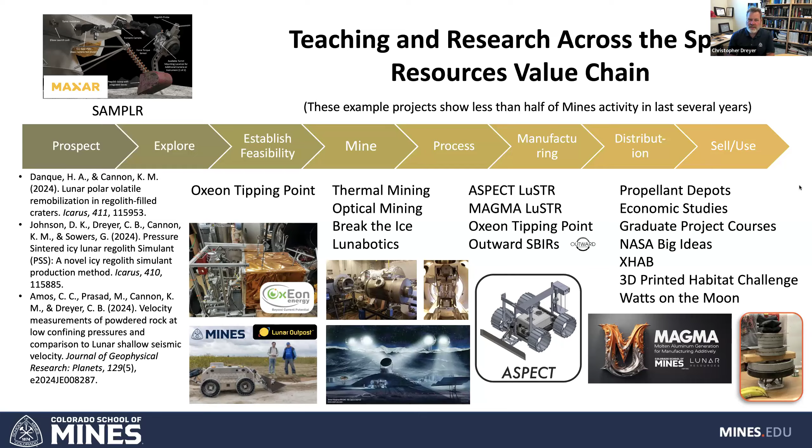So this is a sampling of various things we're doing. I'm going to go now into a couple slides that highlight individual projects. There's 3 different projects I'll highlight. This is the first one, where with Oxeon we demonstrated solid oxide electrolysis of water. Oxeon is the company actually behind the solid oxide stack or processing unit that's part of MOXIE, the ISRU demonstration on the surface of Mars that has converted Martian CO2 into oxygen and carbon monoxide.

It does have to be run at high temperature, but that gives you an opportunity to use thermodynamics to recuperate a lot of heat that goes into your reactants, that is present in your products. Some of that heat can come from the products, moving heat from the output side to the input side. It gives you some advantages, particularly gets your specific power down lower than any other process that you could conceive of that's similar to this.

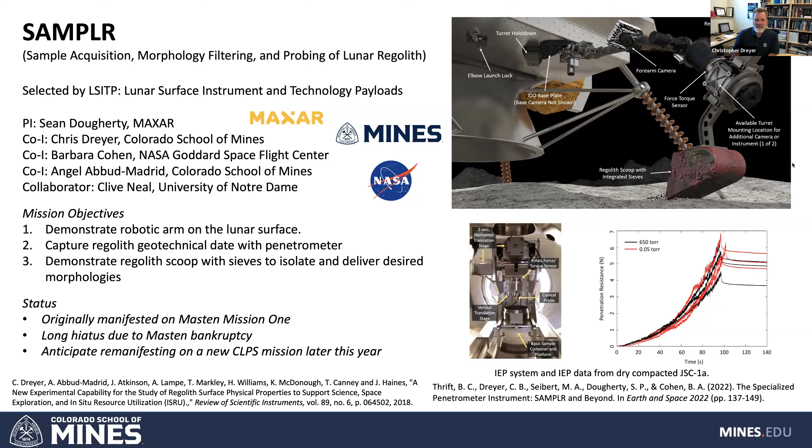Moving on, another big project occurring here, and I'll probably spend the remainder of my time in this presentation on this, is ASPECT, which is a NASA LuSTR-funded project to develop a push-button autonomous real-time motion planning vehicle capable of preparing a lunar surface for landing pad construction.

I'm the PI of this, and we have a large team, several different people at Mines: myself, then Andrew Petruska and Neil Dantam in robotics and autonomy. Jamal Rostami is a mining engineering professor, and the test site's going to be built in a location he manages. Dr. Cannon's been advising on simulated lunar surfaces, and George Sowers on infusion. We have a compaction system being developed from Michigan Tech under Paul van Susante.

And the base vehicle that we build off of has been built by Lunar Outpost. There's advising on terrestrial experience and site preparation from Bechtel, and Dr. Phil Abel is our NASA technical officer from NASA Glenn, who's been with us all the way along, giving us advice and suggestions on how best to do this.

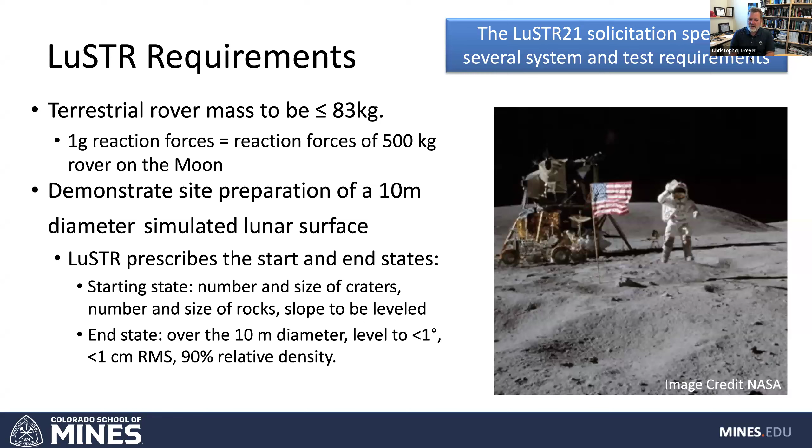Also, we're required to do a demonstration of preparation over a 10-meter diameter. This is so that we have enough movement, enough regolith we're moving. We have craters that we have to fill in. There are a number of craters that are very specified, and we have a starting state that's roughly level, and a finished state that's roughly level and relatively smooth. There's a 2-meter diameter crater that has to be filled in, a number of other craters of different size, rocks of different sizes too, that have to be moved. So a 10-meter diameter site is relatively large, and we're building one here.

So why are we doing it this way? The available reaction mass, the weight of the vehicle, is all you have to work with. So due to low lunar gravity, this inherently minimizes the amount of regolith you might move per step. Our approach is we're going to carefully manage cutting and traction forces. We would tend, to the extent possible, to move only the low density, loose regolith as much as we can, as opposed to cutting into deep and dense regolith.

We also feel autonomy should be used in this context because all this would occur before human arrival, preparing a site for, let's say, a human-rated landing vehicle. And we have pursued where we are just imposing that we don't use teleoperation. In all likelihood, this is something operating autonomously with periodic human check-in to see how it's going and manage the process, but not continuous manual operation.

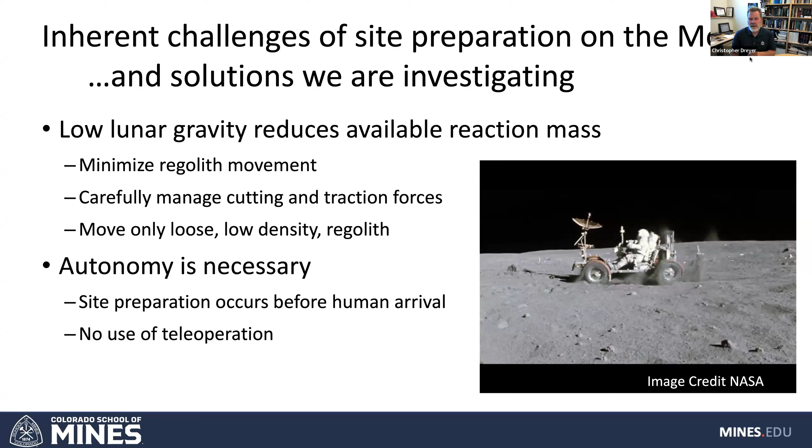This is the vehicle we built. This is in CAD. I'll show you it actually driving around in a little bit. On the left is our mass breakdown, and that's how we arrived at the successful mass. It's roughly 2 meters long, a little over a meter wide, and about 1.5 meters tall. What we call the dozer blade is on front, with 2 degrees of freedom. It's really a straight ahead blade that we can raise off the ground and tilt. We have rigid wheels and skid steering.

We've spent a fair amount of time lightweighting the wheels. Lunar Outpost spent a fair amount of time with the vehicle chassis. All the guts and power supplies and brains are under the box, and then there's a base plate that everything's attached to. And the compactor is in the back from Michigan Tech. This might still be an earlier version of it, but it gives you the sense. We'll talk about how that works in a moment. And then there are sensing platforms spread around as well.

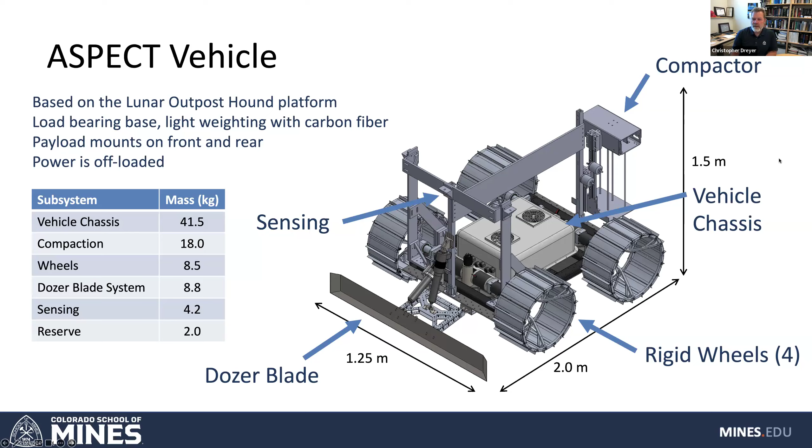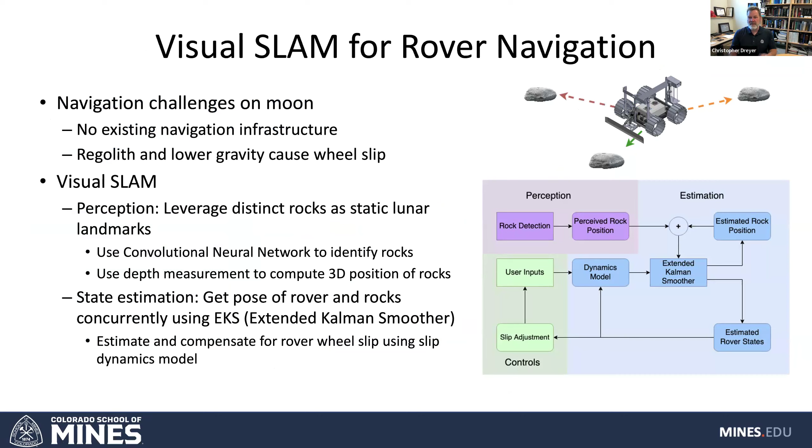We're using visual SLAM for localization of the vehicle within the test bed, cueing off different objects within the bed, both surface and rocks and craters. There's a neural network that is built to identify rocks just on images. And we use some of the best state-of-the-art methods to build up this SLAM. A little bit more on that.

One of our processes has been that we're using visual identification of rocks through a neural network. What we've done is we've taken a number of rocks in lunar images, lunar databases to see the texture and features we can see on those rocks. We have others in our test bed. These have been scanned and gone through the same process. And then we found that we can identify the rock within a scene.

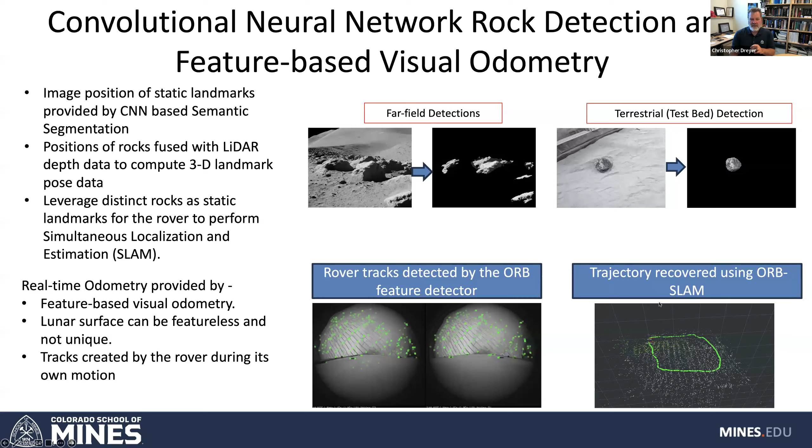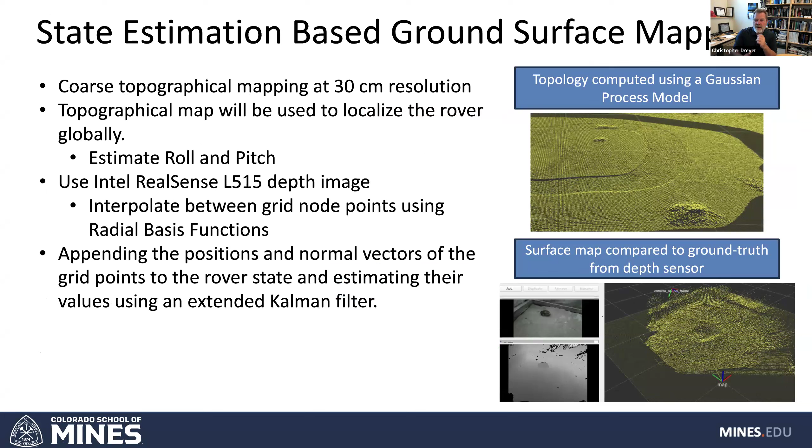And that's identified within a LiDAR system that identifies and maps the entire surface. We're also using features on the surface to help us do the complete mapping and finish out the SLAM. We're using these Intel RealSense L515 imagers, which have both visible light cameras and LiDAR. And these show some of the images of this.

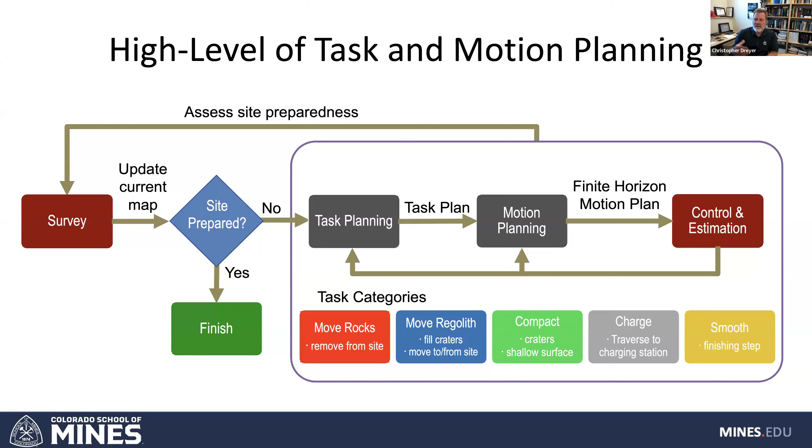At some later state, it's determined that we're done with completing the assigned task, and we go back to resurveying or updating the survey of the site and assess it again. After each task, the site is progressively moved closer and closer to the finished state.

Within the ROS program itself for planning the task, this is from our computer science folks, it's subscribed to and watching the LUSTR map and the LUSTR rock positions, takes that to determine the plan and iterates on this a number of times until it's ready to publish that to the actual vehicle. The LUSTR plan is the plan passed to the vehicle.

In general, for task planning, these are the questions we're asking ourselves about how to operate this task planning. In general, it would proceed as in this little schematic on the bottom: remove rocks first, then remove hills. Hills contain the material that is generally filling the craters. Do those processes, level the surface in general, and then compact and smooth. We do expect some iterations and back and forth on that.

In some cases, when filling the craters, the largest crater will remain a hazard to drive in until it's full, and possibly may even need some compaction before it's ready to be driven through. And we're working on this. Individual steps in this process have been executed already, but the full demonstration is coming up.

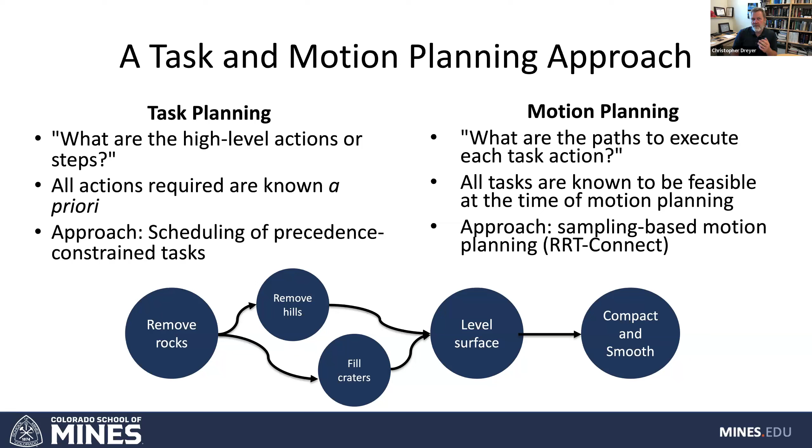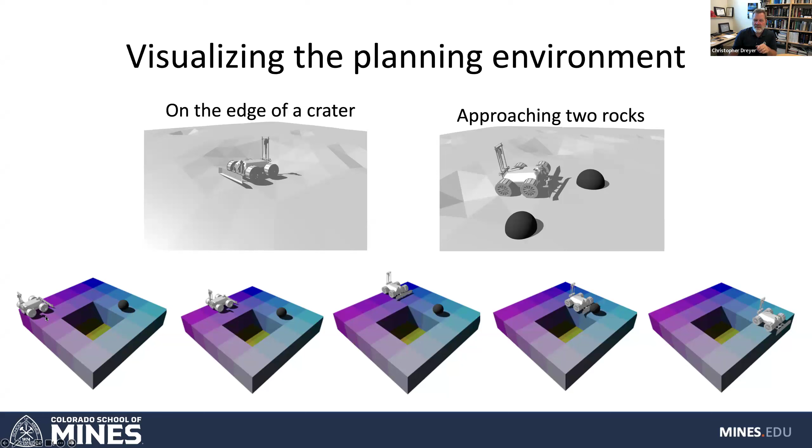a landscape or workspace where each grid point is categorized or given an assignment, an elevation, a state like it is a crater or it is not, or a rock is present or not. And the task planner works with that kind of state representation of the surface. This is just a simple example of the rover avoiding the crater when moving the rock.

Now on to regolith manipulation tools. One basic principle we've used is that we are moving loose regolith. We have a multi-purpose bucket that can do grading, regolith manipulation, and rock removal. There are a number of different steps in the process that we conceive of, such as pushing a rock, lifting a rock, smoothing by moving backwards, and then ripping. Ripping the surface is a way to reduce the surface from its dense state to a low density state, which then makes movement easier.

We also carefully designed both the bucket and the wheels together by modeling them with some simple classical analytical models, then building test beds and verifying their design, verifying, of course, the cutting and traction forces we achieve.

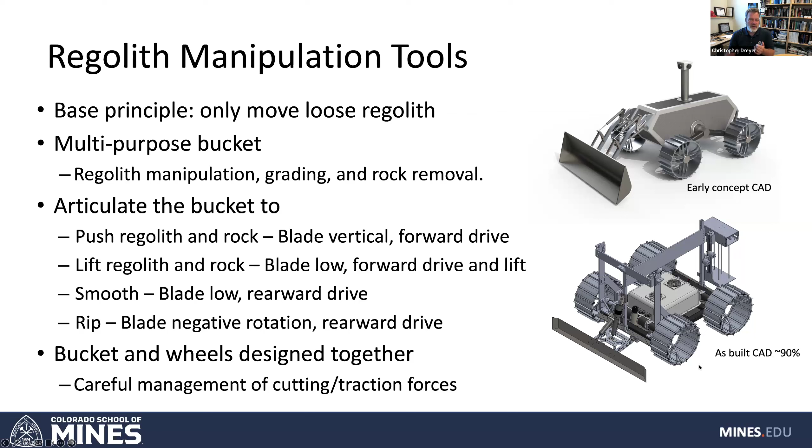In the early concepts, we had a bucket built much more for lifting material and carrying it to a new location. As we executed on this, we realized that lifting and carrying regolith over the size of the site is really not necessary. And so a more straight-ahead, smaller bucket was what we went with. That is really about pushing regolith across the surface.

This is from some of our dozer blade performance testing, where we're pushing regolith within a test bed, measuring the pushing force over time. And of course, it builds over time. We're then carefully measuring how much material is in the bucket and how much material has been moved, and we're getting to loads of around 120 newtons.

Pushing rocks is also something done. We've primarily looked at rocks that are sitting on the surface, rocks that are partially buried, or, for future iterations, ones that might need additional mechanisms. The rock pushing loads are quite low. So it's really the regolith pushing that's dominant, and it's very important to point this out.

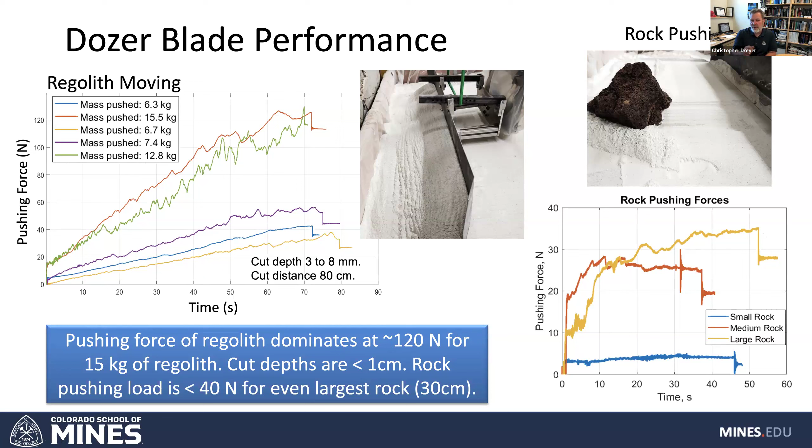The cuts are quite shallow, less than a centimeter. The cutting forces build very rapidly as you go deeper, so careful control of your cutting depth is important. We also have a wheel test rig we built for this. You can see the wheel in the upper right video. It's self-driven with a motor on the one side.

There's load cells in the structure to directly measure the load that it's pulling. It's running across a rail, and on that rail, the carriage has resistance and a load from a weight on a pulley in the back.

We have direct linear motion from a linear encoder, and then of course rotary encoders on the motors, so we get directly the slip ratio. This is the amount of slip. If you look carefully in the video, you'll see a little bit of slip, the difference between the commanded rotation rate and basically how much rotation you actually have linear versus how much rotation you have in the wheel.

We're getting a single wheel drawbar pull of around 200 newtons, and that's sufficient on a single wheel. Actually, this is for the full vehicle, but this is sufficient to give us everything we need for pushing.

They're kind of roughly compatible, and we're continuing to work on our data here, and we expect a publication coming up later in the year.

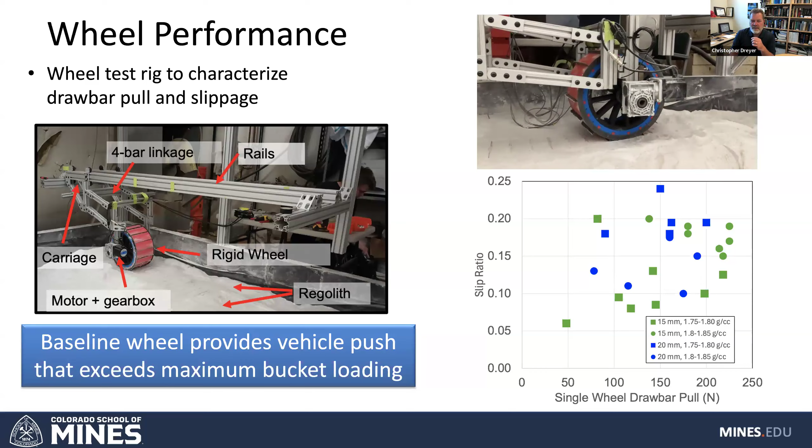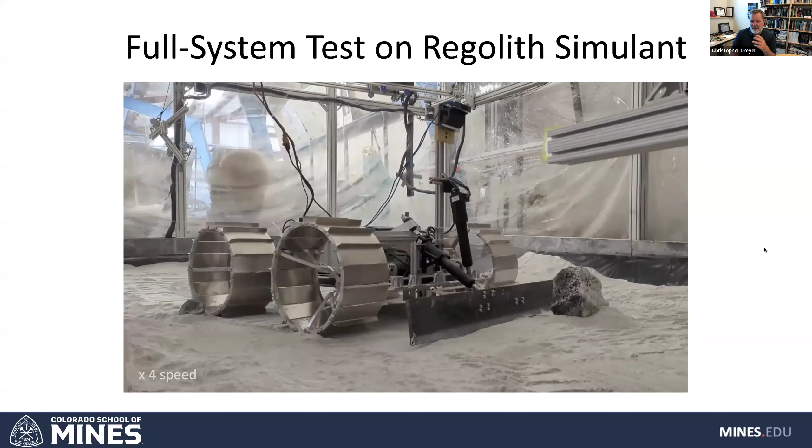Here's the full system test with our wheels and dozer. This is teleoperated by somebody standing off to the side, and you see mostly some regolith or rock movement. It is sped up, and you'll see some things like smoothing out the surface, some adjustment of the blade, and more regolith movement and rock movement.

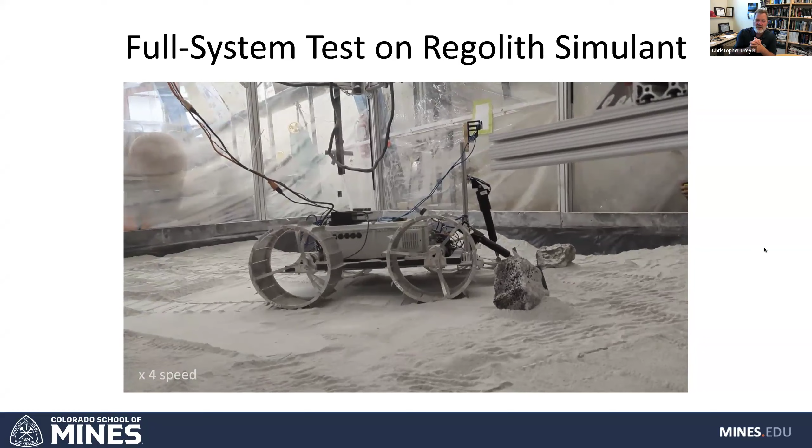So the vehicle's driving around. We're seeing good traction, good regolith movement, and we're close to our full-scale testing.

Compaction is coming from Michigan Tech under Paul van Susante's group. The concept here is to use vibrating pins that are inserted quite deep into the surface. This method really is going for compaction of a surface to significant depth, such as much as 30 centimeters.

Reason for 30 centimeters is the natural surface is at a low density at the very top, and then progressively becomes denser, reaching about 90% relative density at around 20 centimeters. That's our goal depth, and that's our goal relative density: 90%.

The bigger crater to be filled in will have a depth of 40-ish centimeters, so it'll have to go in a couple passes. But it is going to be a large depth to compact.

It's also very important that there's a loaded plate on top. Some early estimates put the pressure you have to apply on the plate at 100 kilopascals, but it's been found it looks like it can be down at 5.5 kilopascals. But that's a very important step in the process, as the surface compacts, you need to apply pressure to the top to keep it together.

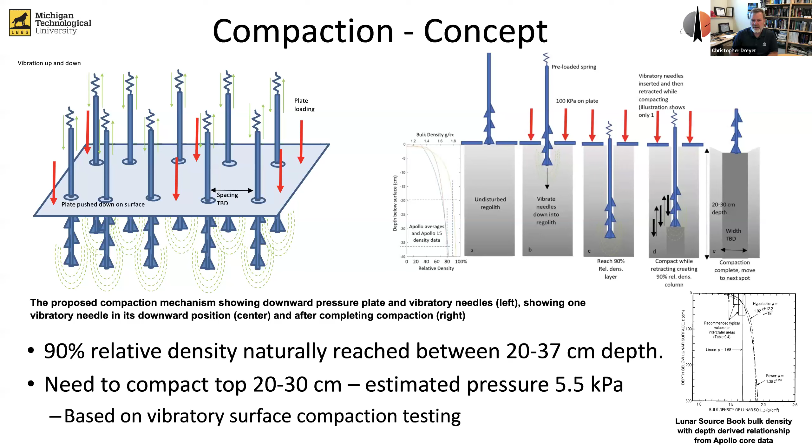Here are some of the testing results of single pin actuators. On the left, you'll see this running: the pins being inserted in the surface, then the plate is coming down, and in a moment it'll start vibrating. There's also a kind of planned motion of vibration with motion of the pin up and down. They found this to be effective in producing compaction.

When this is done, we pull that out and we can see a compacted surface. There's been multi-pins done as well, and kind of scans of the surface to get a measurement of the compaction. And some things we see is that if you start at a very low compaction state...

This running now is the vibration unit, which sits above the pin, and it's eccentric weighted gears that are providing vibration. So at a low compaction state, we achieve a moderate compaction. Then in a moderate compaction state, we achieve high compaction close to our 90% goal.

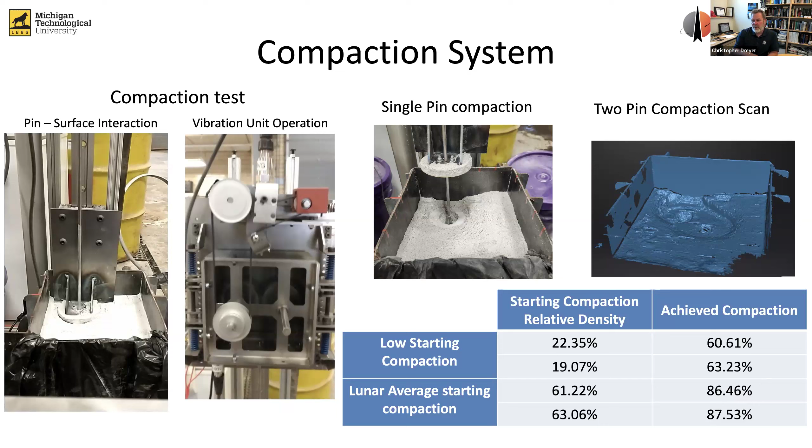There's expectation that with improvements in the cycling of the pin and the vibration frequency, or the duration that we spend vibrating, you might be able to go all the way to high compaction in one step, but it might be a two-step process.

These are also just fresh off the presses, showing the unit at Michigan Tech that's being finished up. The video running right now is pin insertion.

And on the right is pressure plate motion, I believe. Yeah.

And as you can see, decisions had to be made about the number of pins being used here. Ultimately, in this compaction method, the number of pins could be varied, more could be added, but the number is limited by the reaction force provided by the vehicle, which again is limited to 83 kilograms.

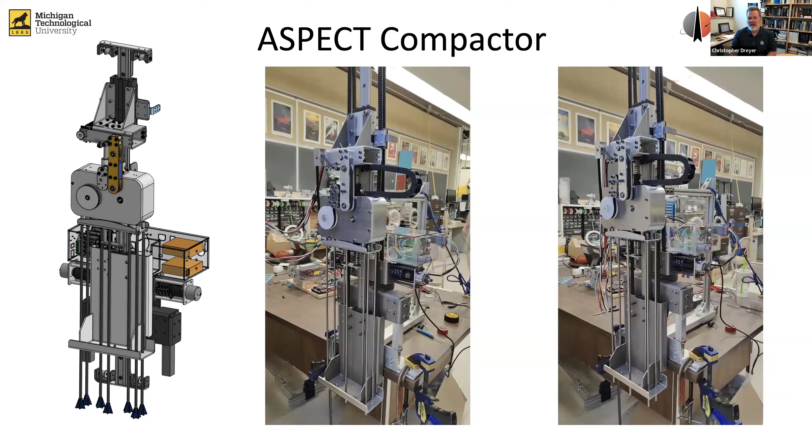This compactor is going to be delivered to Mines in the next couple weeks.

There's a big effort to build a large lunar test bed, the ASPECT LuSTR testbed. It's a bit over 100 square meters and roughly 110 metric tons of regolith. It's going to be located at a site called the EMI, on the Mines campus in Golden, Colorado, in a warehouse type space where the major work over decades has been rock mechanics in the mining department.

We're taking over a section of that space and adding this. We've had a smaller test bed in the EMI for years, and the demonstration of the Aspect rover was in that smaller test bed. Now we're building this large one where we can do a 10-meter diameter area.

This is a rendering of it, where we're also adding a gantry system that provides trailing power, weight offloading the power essentially. The rover is plugged in and provides power externally. All communication is wireless; all decision making and processing is on the vehicle, none off it. We're just passively receiving information wirelessly. So technically this is a weight offloading system, but we're really only offloading the weight of the cable, though it has a little additional capability.

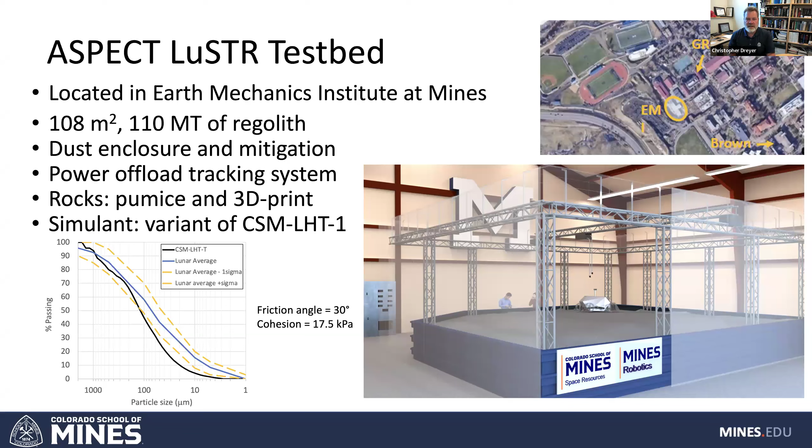We're also looking at this infusion task, to take what we're learning here in site preparation and see how we can scale it up. Another direction from the LuSTR solicitation was to look at a 100-meter diameter landing pad, what all the ancillary equipment would be, and what a path to flight would look like.

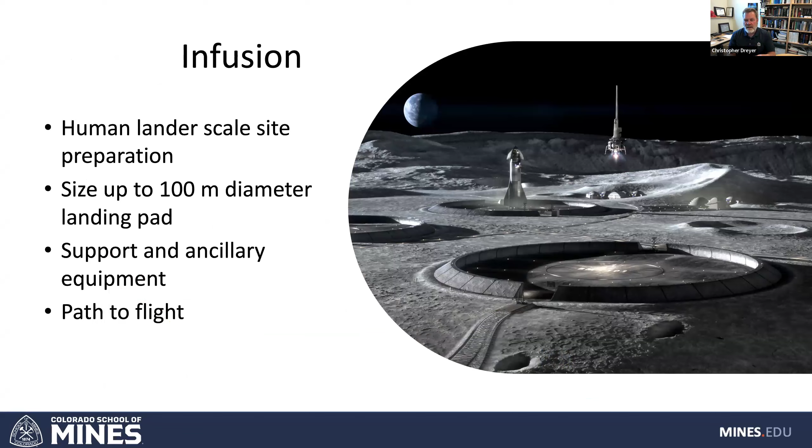There's been an overall site preparation system specification written, and we're looking at an operational model to understand site preparation times. With the baseline numbers we have, most of the distance traveled, which is kilometers worth of travel, is spent moving regolith around to fill craters. Most of the time, though, is spent in compaction.

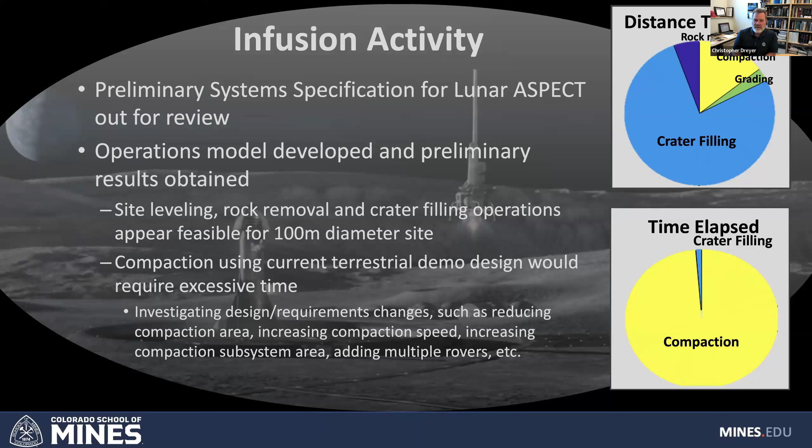We've since refined this and now find we have a likely path to reduce compaction time significantly, primarily because time spent compacting a crater is long since it's deep, while time outside craters requires simpler compaction where the compaction depth is not significant. We're now looking at something on the order of two lunar days to complete site preparation, but that's still preliminary.

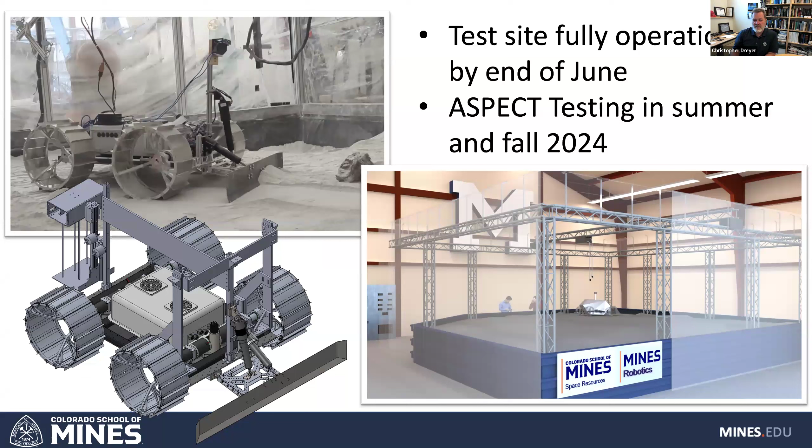So finally, some highlights: this test bed will be operational by the end of June, and ASPECT testing will be occurring through the rest of the summer and into the fall. Look for results from us in that time frame. That's it for me for this talk. Thanks everyone for joining us, and let me know if there are any questions.